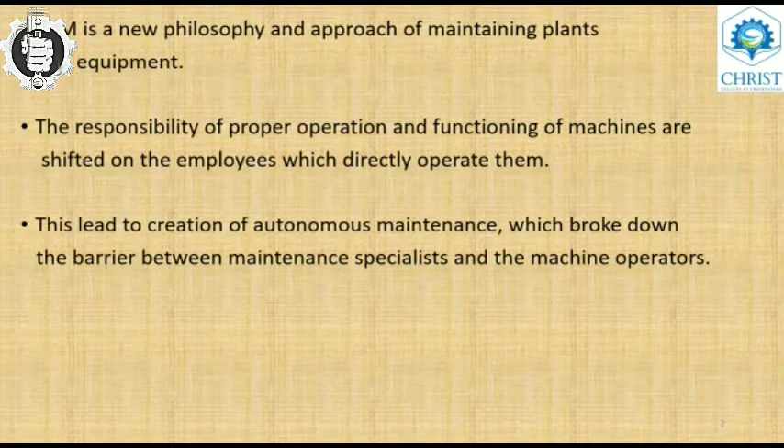For improving the productivity, as defined by TPM, the responsibility of proper operation and functioning of machines is shifted onto the employees who directly operate them. This led to the creation of autonomous maintenance, which broke down the barrier between maintenance specialists and the machine operators. So with TPM there is not a large gap between the maintenance specialists and the machine operators. It is almost like an autonomous method.

TPM is defined by Seiichi Nakajima, so it is a Japanese method. TPM is defined as an innovative approach to maintenance that optimizes equipment effectiveness, eliminates breakdowns, improves productivity, and promotes autonomous maintenance by the operators through day-to-day activities involving the total workforce. So it is simply an autonomous maintenance method, and TPM is worked by the operators themselves.

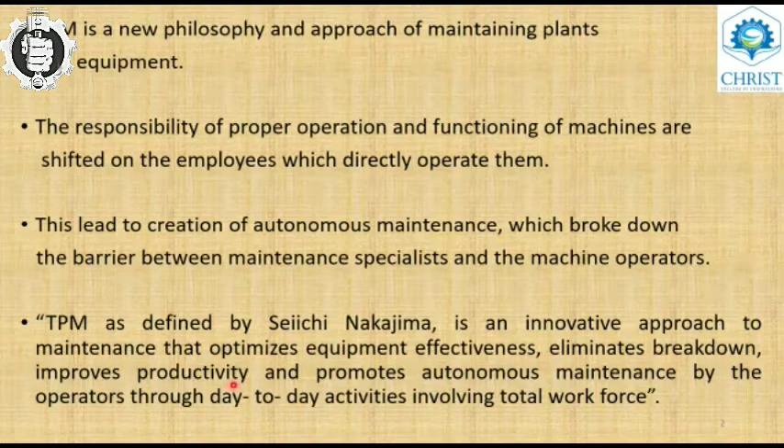So it is an operator-centered program. TPM is based on the operators, through day-to-day activities involving the total workforce. Each operator is a part of TPM, and they are the masters in TPM. The purpose of TPM is to optimize equipment effectiveness, eliminate breakdowns, improve productivity, and promote autonomous maintenance methods.

TPM: T for total, P for productive, and M for maintenance. In total, all employees are involved in it. It is a total program of all employees, and it aims to eliminate all breakdowns, defects, and accidents. In productive, many actions are performed to improve productivity. New methods and implementations occur here, and troubles for production are minimized or eliminated, for improving the total productivity.

Lastly, in maintenance: check, clean and lubricate, repair, etc., such things to keep the machine in good condition. Total productive maintenance.

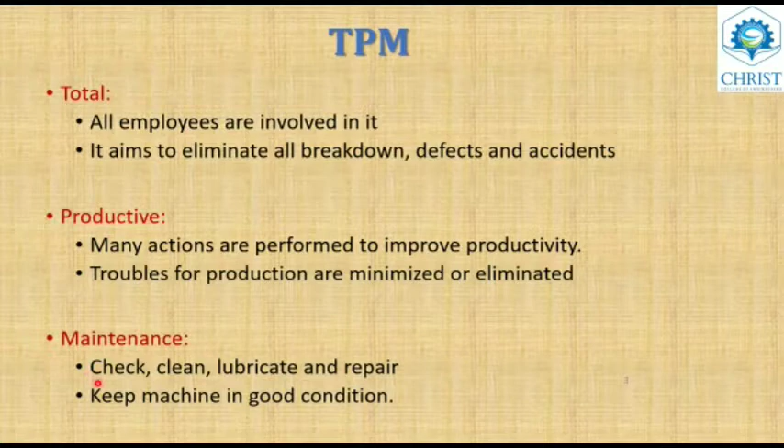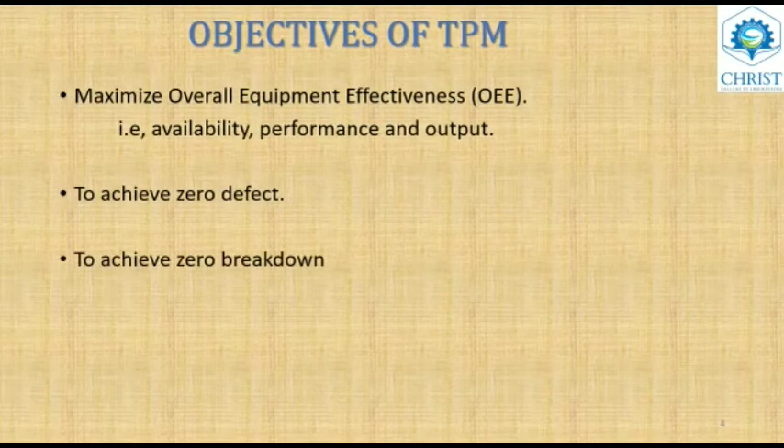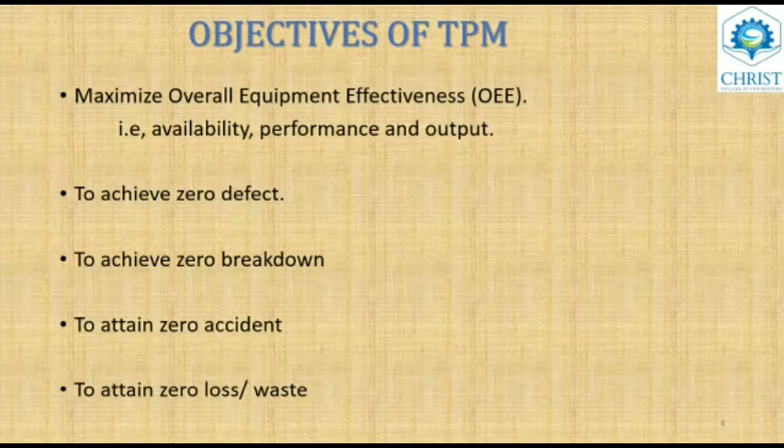So what are the objectives of TPM? Maximize overall equipment effectiveness, that is availability, performance, output, etc., achieve zero defects, achieve zero breakdowns, attain zero accidents, and attain zero loss or waste. We can attain all these objectives if we hand over more responsibility to operators. So it is an operator-centered method.

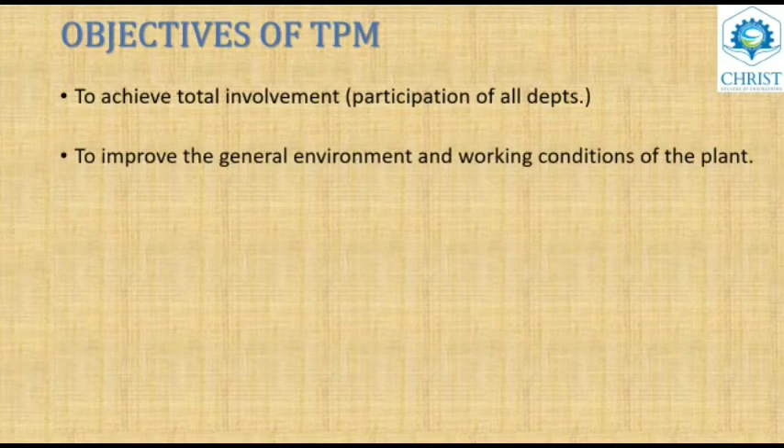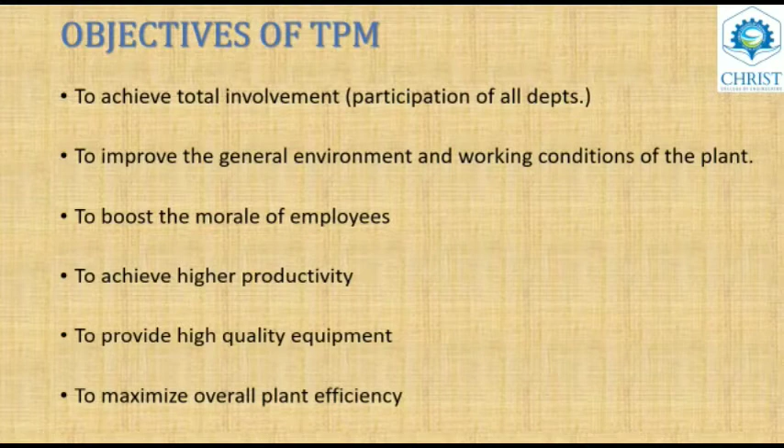The objectives are also to achieve total involvement or participation of all departments and all workers, to improve the general environment and working conditions of the plant, to boost the morale of employees, to achieve higher productivity, to provide higher quality equipment, and to maximize overall plant efficiency. All these objectives can be achieved by enhancing each worker.

Principles or features of TPM. This method has some principles that each worker and the total system must follow: increase the overall equipment effectiveness; maximize the useful life of the equipment; the operator is the best condition monitor; involve all departments and utilize teamwork; provide training to upgrade operation and maintenance skills; and establish a total system of complete maintenance.

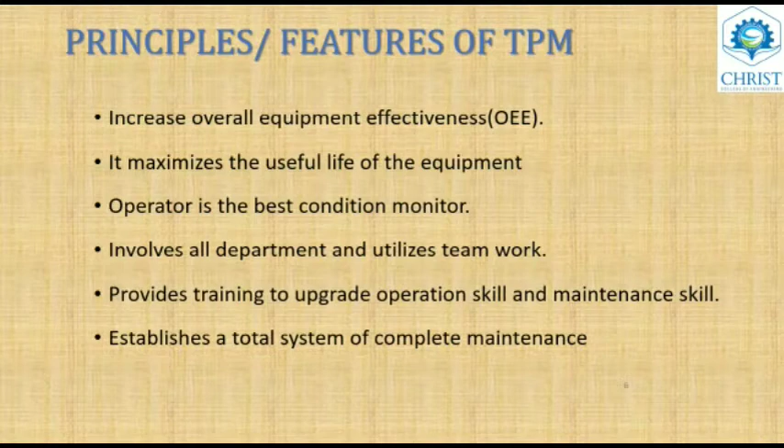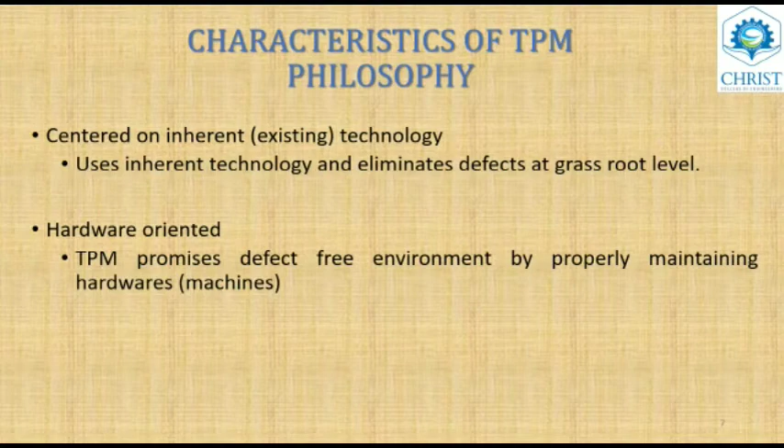What are the characteristics of TPM philosophy? TPM is centered on inherent, or existing, technology. No new methods are implemented here. It uses inherent technology and eliminates defects at a grassroots level. It is hardware oriented, meaning TPM promises a defect-free environment by properly maintaining hardware, so there should be very few defects.

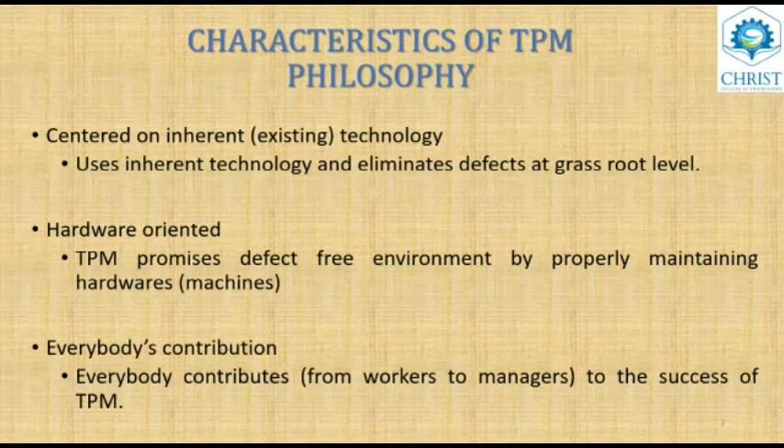And everybody's contribution: every worker contributes, from workers to managers, to the success of TPM. In TPM, the responsibility runs from workers to managers. It is everybody's program. Also, credit to all: every individual of the organization enjoys the fruits of success, which are distributed to everyone from worker to manager.

Introspection through cause and effect analysis. Each person at every stage of the job checks whether there are any defects, damage, or failures. The causes and effects of any failures found are also studied, and efforts are made to prevent them. And respect: everybody respects the system and its culture, because TPM is everybody's duty.